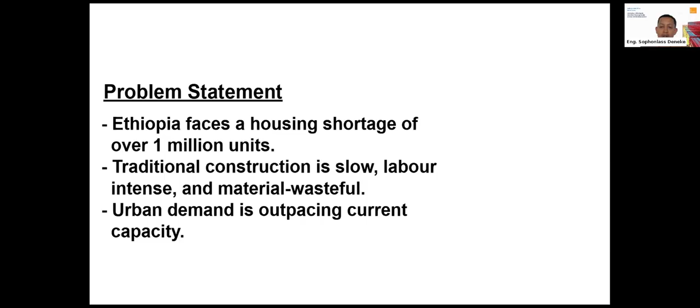Okay, thank you very much. I'm going to talk about transformative sustainable construction using a revolutionary technology, that is 3D concrete printing technology. Next slide, please. Okay. So I'm based in Ethiopia. As you know, Ethiopia is very much fast-tracking the construction industry, and there's a lot of corridor development. There's a lot of dam, airport, and mega projects.

And with that, Ethiopia is facing a housing shortage as well, because it's the second largest country in the continent, and there's over 1 million units shortage. The traditional construction is slow, labor intensive, and material wasteful. And the urban demand is well known. And right now we are trying, in 5 years, to construct 1.5 million units of houses.

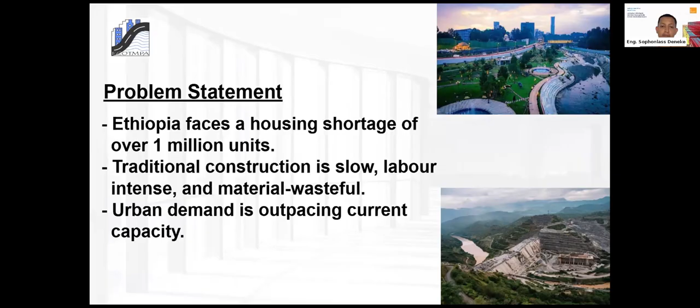So with all this shortage, there is project management and there's construction and civil engineering solution. And one of the things that our association, with different institutions from Dubai, UAE, and Austria, has tried to be doing for the past year is giving a solution for this problem. Next slide. Am I able to change it or somebody's changing it? Okay, thank you. And our solution is this 3D concrete printing.

When we say 3D concrete printing, there are different printer technologies, but this one is a lost formwork system. It's a kind of thing that we try to make a homegrown system. Instead of formworks, plywood, metal sheet, and everything, we print panels of formworks using concrete, and using those, we can do all the vertical and horizontal parts, and also incorporate the conventional way of pouring concrete, which can be done on site or in a precast system.

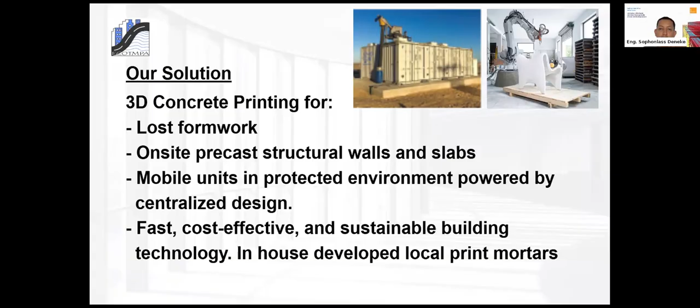And there are also mobile units, like you see in the picture, a containerized format, where it could be acquired by doing this reduction in cost, time, and schedule. So these are some of the things that we try to achieve, and we have tried to work with a 3D printing manufacturer to be locally adaptable. That means we use our own local materials, our sand, limestones, and cement, so that there's no need of importing materials. Next slide, please.

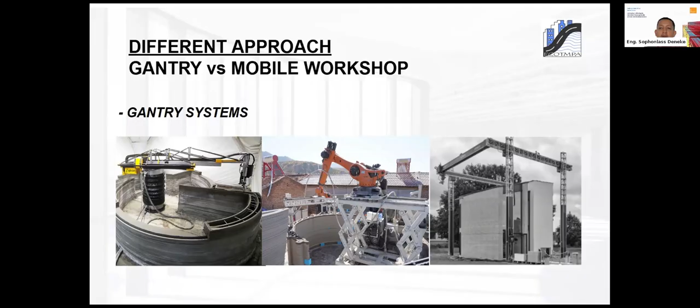And there are different approaches, as I said. There is a gantry versus a mobile workshop. The gantry system, as everybody knows, is set up within the building and tries to print out the whole building, but it doesn't go up more than ground plus 2, as far as I know. And also there are cracks and different setbacks. So we have tried to develop it as a lost formwork system. Next slide.

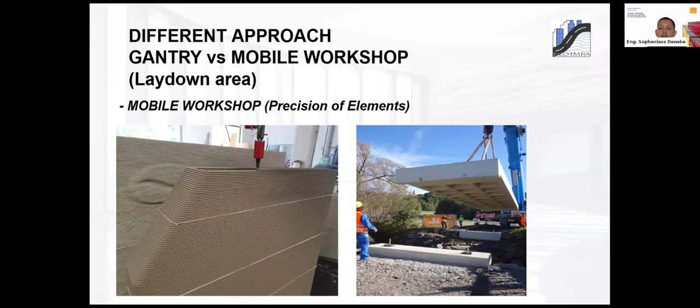And on the right side, as you see, for any infrastructure according to the requirement, we can put these hollow cores or different void spaces to reduce waste of materials or cement, rather than the conventional formworks filled with whole concrete. We avoid what we don't want, and that's how we can minimize wastage and also reduce cost. Next slide.

So the technology advantage, as mentioned, up to 480 square meters per day capacity can be produced with a 4-unit workshop. And we have tried to do a ground plus 9 block in 30 days. It reduced building time by 50% from the most advanced construction that we have in Ethiopia. It reduced the concrete and rebars by 40%. It enhances labor productivity by 40%.

People are afraid that when there is a concrete printer, labor will not work or loss of jobs will be there. But this is not the case, because it is a hybrid system. We use the conventional part as well as the 3D printer. We can mix it up. Let's say if we want the production of vertical elements only by the 3D printer, the horizontal elements will still be done the conventional way.

By that, we can achieve all these remarkable numbers, as well as create jobs for a lot of people, because we can do 2 or 3 times more with the finance or budget allocated to different projects. Next slide.

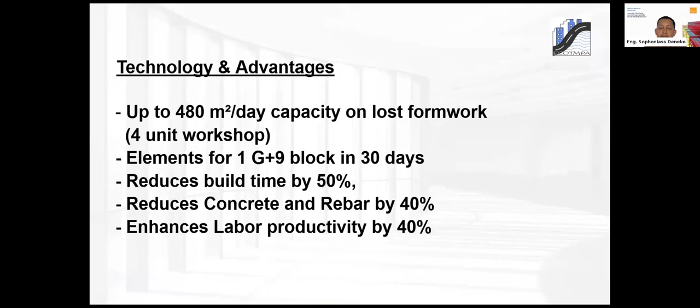And looking into the environmental and social impact, 50% less waste and 70% less timber usage from the previous trend. And it is a mobile workshop that minimizes logistics, because with precast systems or modular buildings, you produce it in one place in a factory, and there is transportation from place to place. That also will reduce CO2 emissions and reduce different logistics. So it's safer, digital upskilling will be there, and more job creation will be achieved by doing this. Next slide.

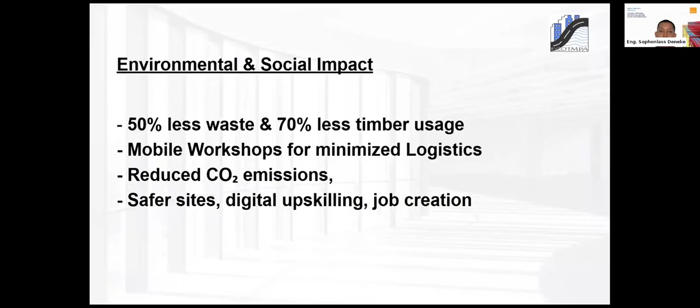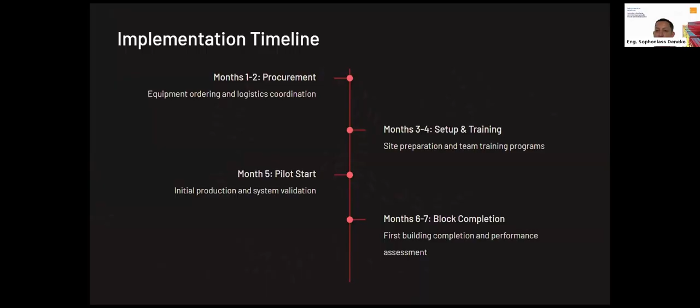So implementation for the project takes between 1 to 2 months from the procurement stage, up to 3 to 4 months setting up and training on site, because it's very easy, as training has already been done online. On the 5th month, the pilot project will start, and between 6 and 7 months, the first futuristic building project will be completed, which is a basement plus ground plus 3 building, which we intend to finish in 1 month's time. Next slide.

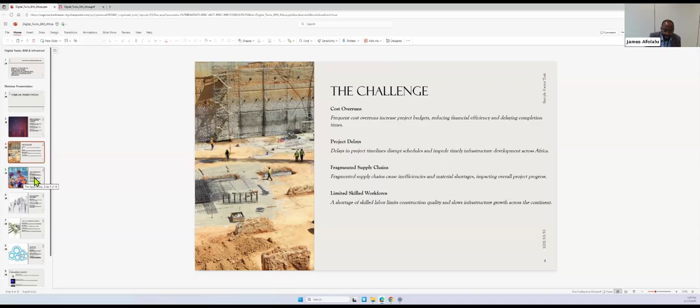And we have cost overruns. So these are challenges that digitalization and digital twin, as I explained, will help us to deal with. Project delays, broken supply chains, and the fact that, in spite of a lot of people in Africa, that doesn't necessarily translate into a workforce. So those are all areas that we can address and improve our level of performance and efficiency by using what are relatively simple tools. So we could use them.

It's about, for example, collaboration. If we have an engineer who is living in Lusaka and another engineer living perhaps in Lagos and a team that is perhaps in Accra, what are the possibilities that you could connect all these three people and actually work on the same project at the same time in the design of the project, or even in the management of the maintenance of a particular institution? So that allows us, using the digital tools, to collaborate better. There's also a lot of waste reduction because of these kinds of tools.

But in fact, maybe the most promising that I've seen is in the area of predictive maintenance. I'm currently engaged in one of the biggest airports in the world, very busy, Schiphol Airport in Amsterdam. And this airport has invested billions of euros in making sure that absolutely everything you can imagine that has to do with the airport's assets is digitized, not just in 2D, but in 3D, and using BIM language, actually in what we call 4D and 5D. So that allows us to connect and actually think sometimes years ahead in terms of how we do the maintenance, allows us to make purchase orders and make decisions about how the future of the airport will look.

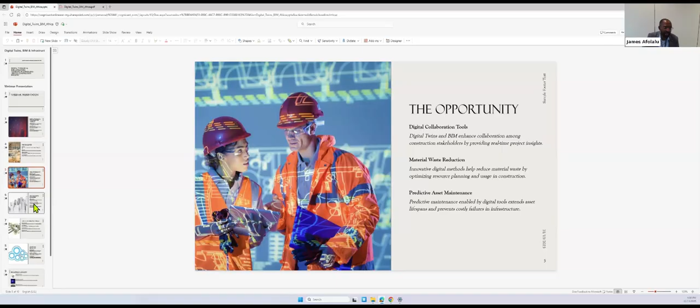It's the maintenance of our assets, which this could have a huge impact on. Think about all the airports and all the other infrastructures that we have in Africa. So a few quick definitions I'd like to maybe share with us.

Just a second, which of my slides is that? Excuse me.

So we talk about different terms. One term that we look at is a digital twin. Well, that's probably the most relatable of them. It's a model, but one which is not physical in any sense. So it's not a paper model, it's not a plastic model, it's not a 3D model, as great as the 3D technology is. It's just a virtual twin that's a representation of the particular asset. Anything from your house to the drainage, to airports, to railway stations, to railway lines.

We use the term also BIM, which is the building information model. And this is more like the industry standard that takes us towards a common language. And that is an area where we might think about upskilling in Africa, because once this common language is understood universally, it can take us to the next level, which is really infrastructure modeling, which extends to using BIM on a large scale for projects, roads, bridges, utilities, and we can sort of leapfrog, take advantage of some of the technologies that have already been shown to be mature in many areas of the world.